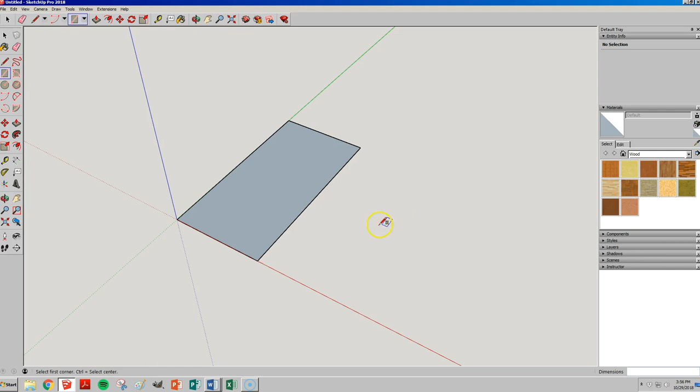By the way, in order to get this, instead of clicking on the rectangle tool, I just hit the letter R, and that gave me my rectangle tool. I'm pushing on the scroll wheel, and that's letting me orbit. Scrolling up, and that's zooming me in. That's probably about good for this drawing.

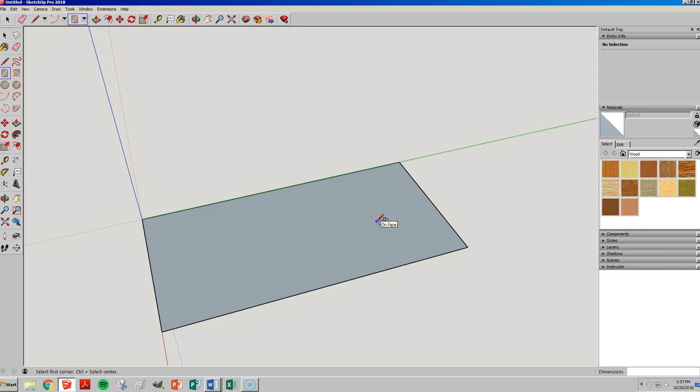Okay, next thing we want to do is push-pull that rectangle to give it the proper thickness, going 8 millimeters up. So we hit P for push-pull, and I'm going to drag it up just to start it. I've only clicked once, and now I'm going to type 8 and enter, and now I've got the beginning of my Lego block.

All right, one of the new things we are going to learn is how to divide lines rather than having to measure absolutely everything. So let's just start with this line. If I single left click that and then right click it, I get all the options, and we are now going to divide it. When I hit divide, I get all sorts of these little dots and things like that.

I can do that by dragging it - if you want to get it to the right thing, that's fine. But really, what I'm going to do, no matter where we drag it to, is override that by typing 4 and hitting enter. That line is now divided. I'm going to do the same down here: right click, divide, 4, and enter. And now you can see if I click on it, I've got individual line segments here. That'll be nice later on, as you'll see.

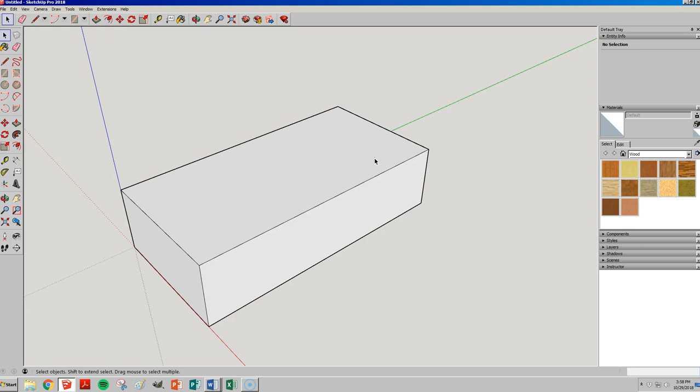I'm doing some math here, I got to count this out. 1, 2, 3, 4, 5. Okay, we're back at it here - I had to look up my measurement there.

We're going to divide this one by 8. Same thing: select with the left click, right click on it, now I hit divide. It's all changing all over the place. I'm going to override it by typing 8, enter. Same on the other side.

Divide, 8, enter. Okay, so now we're going to run some guidelines. Instead of going over to the tape measure tool, I can just hit T, and I get my guidelines set up. We'll start over here.

I guess I should talk more about that. If I click on a point to start my tape measure, it wants to go to an exact thing. I don't want to do that. Control Z is the same as going up to edit and hitting undo, so I just hit Control Z to undo that. I don't want to start from one line, I want to make sure it's on an edge, but just on any edge, so the thing will be red.

I'm dragging it in, and I'm getting this parallel line with the side I started from, and that's what I want. I don't want to go to a midpoint, I want to go until this one ends. Now I'm going to use where I divided my line at exactly 4 millimeters, and do that again to my next point, and to my last point.

Okay, now I have those in there. I'm going to do the same thing going the other way here.

To show you a new way to do that, I hit the space bar to get my select tool. I selected my first guideline, then my second guideline, and I want to make copies of those. I could go click on the move tool, but I could also just hit M. So now I have the move tool, and I'm going to make copies of just 2 lines so it goes a little bit faster.

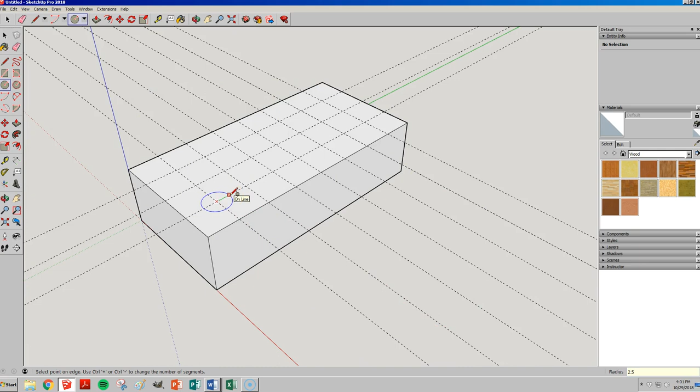Alright, so when this pops up, 'number of segments too large for the given angle and radius,' that means 48 was way too many for that small of a circle, because remember our Lego block is very, very small. So it kind of pre-shrunk it to a size that would work. We'll just continue doing that same thing here.

Another circle, and it automatically goes to 2.5, which is great. I could go ahead and keep drawing these.

But what I want to do for you guys is show you another way to make copies and speed the process up. So I hit the space bar to get my select tool, selected the first circle. Now I'm going to hold down shift so that little plus minus pops up, select the second circle, and now click M for move.

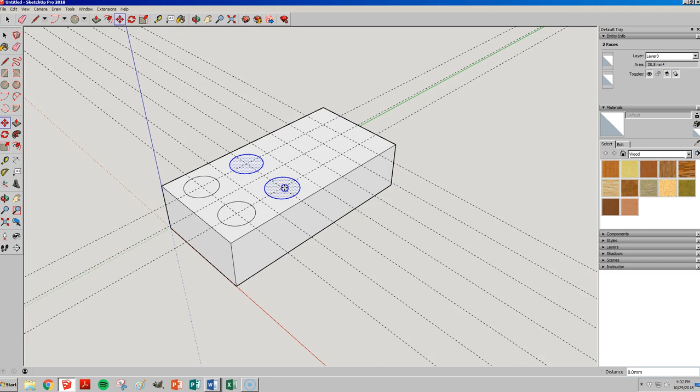Okay, now I've got these circles, and I want to hit control one time and the plus pops up again, so now I'm making copies. We don't want it right there, we want to kind of skip one. There we go, and I'm going to do it again, same process, again. And so now I hit my space bar to click off that. Now I have my circles that I need.

At this point, I do not need guidelines anymore, so I can go up here and delete all my guides.

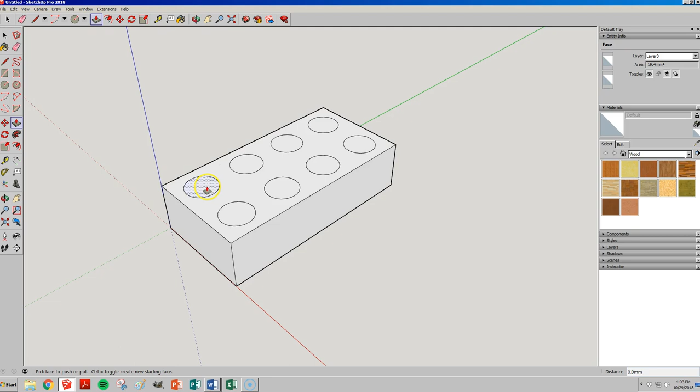The next thing we're going to be doing is push-pulling each one of these little circles 2 millimeters up. So I grab my push-pull tool, which was the P key, click on it, start dragging it up, then type in 2 and enter. Now I can either click it once and infer it by doing this, or I can just double click and it's going to repeat it.

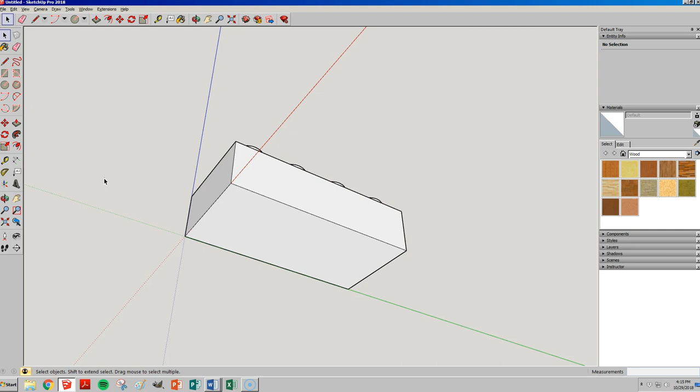What we want to do now is pan to the bottom. We are going to offset our bottom, so that's this tool over here. The shortcut to get to the offset tool is F. As long as my arrow is on the surface, it's going to work. By moving it around, it's letting me choose which edge I offset from. Right there it's on the left-hand side, then the front side, over on the right. Doesn't really matter for what this is doing, but you may need to offset to a particular thing someday, and then it becomes a little more important which edge you're going to.

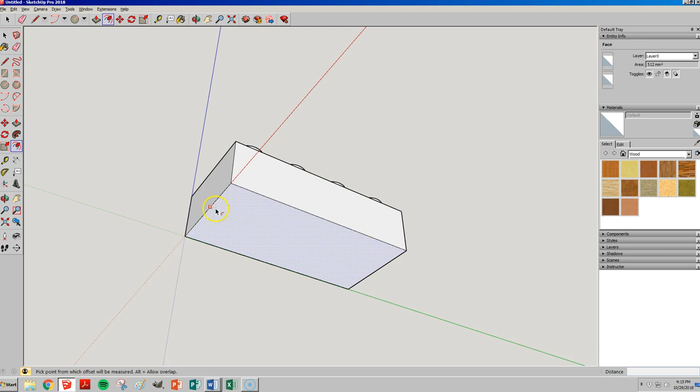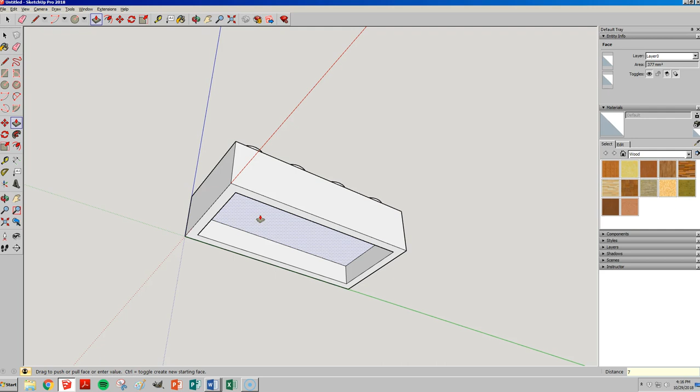But for me it doesn't matter, and for you, click any edge just on that bottom surface, click it once, and then we're going to move it in so it knows which way to go. Type 1.5, enter. Then I'm going to push-pull, so I hit the P key, moved it up, and we're going to go up. Let's make that 7 millimeters. So we're going to go up 7 millimeters, and there we are, we have a new surface.

At this point, orbit to the bottom, or you can go up to your camera and go to standard views and get a good view of the bottom there. Only thing for me is I'd like to get a little bit of a side view like this.

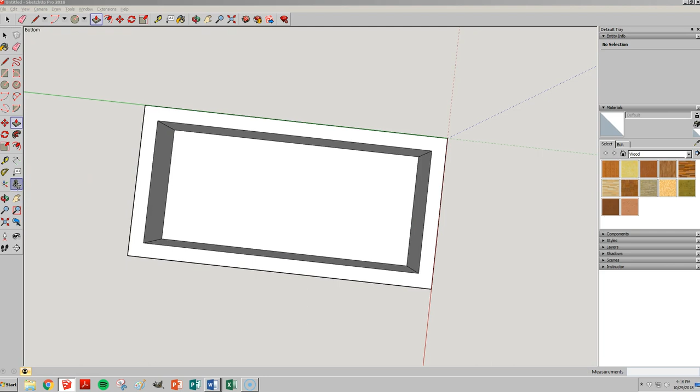Now we're going to create a watermark. How do we do that? We use this 3D text tool. Click that, and you're going to get a dialog box that will appear here. Mine's a little slow today, it's kind of lagging. Then this box pops up. This is what we want to mess with. When you first click it, this is highlighted. We want to change that. Type in your last name.

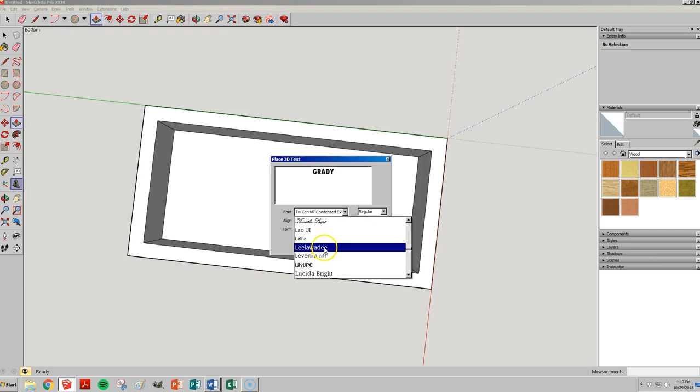You can go that, you can go all lowercase, doesn't matter. I'm going to go all uppercase. And then I can choose my font. Let's highlight it again. You can go to any font you want. Have fun with it, or if you don't care, you can just go with what's selected. Where's just an easy one here? I'm not too worried about it for mine, so I'm just going to pick a kind of a bigger, bold one. So I went with Impact there. Regular, we want that. Centered is totally up to you. If you want it to the left, right, doesn't matter. I'm going to stick with centered.

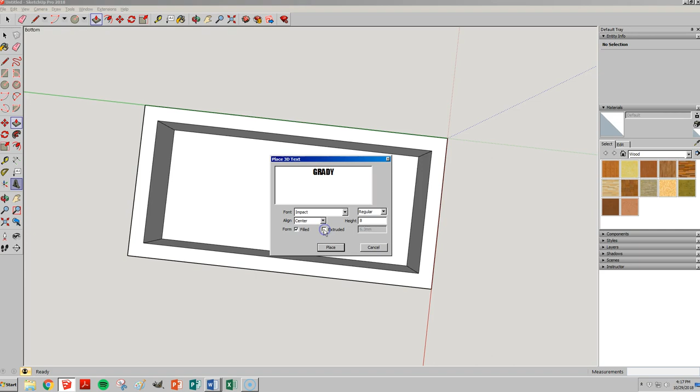Height is what's important. Yours may be a really large number. Remember on our Lego block, from here to here is only 16 millimeters, and from here to here is 32. So if this number is like 200, it's going to be way too big. So let's try 8 millimeters on that one. We do want it to be filled. If it were to be extruded, if this is checked, it's going to make that text a full three-dimensional thing. We don't want that for what we're doing, we want it just two-dimensional. So uncheck that, that makes this box that we can't write in it.

Then I'm going to hit place, and there's where I want it, on this surface. But mine is clearly not facing the right way. So once I click to place it on that surface, it takes me right to the move tool. I never had to click M or anything like that. And we want to spin that now, and by going on these little red crosses, we can do that.

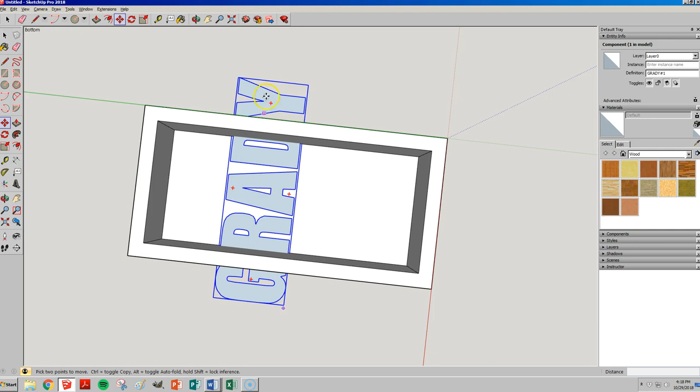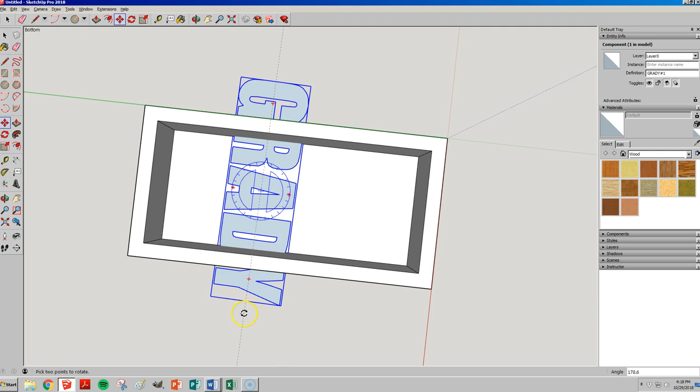So I'm going to grab it there and spin it. You can see over here we have our angle that we're going to spin it. So if I want it this way, -90. If I want it like this, I'd probably go... we don't want anything close, you know, 179, that's close, but we don't want that, we want it exact. This way would be 90. So I want it like this, so I'm going to go with -90. Even though I'm close right there, I'm going to override it by typing in the keys. -90, enter. Now I'm going to move it so that it's in the middle.

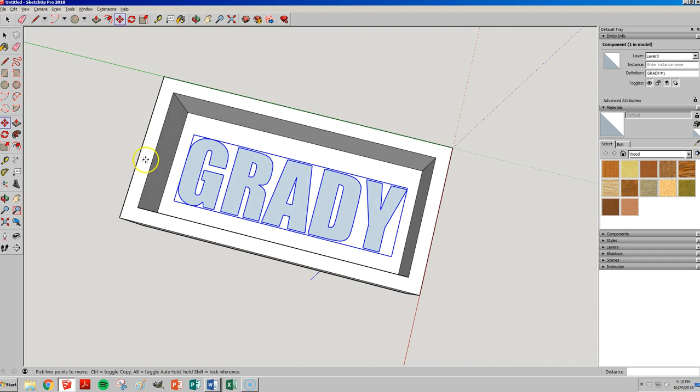So we got that set up now, that's where I want it. But what we got to do now is we're going to do some erasing. We've not done much of this in terms of very specific deleting. We're going to do that by going to the select tool or just pressing the space bar.

I want to get rid of this line, this line, pretty much all these ones that we made by push-pulling the surface. We're going to end up redrawing these again shortly. I don't want that, I clicked the surface there. But all of these lines here, I've got them all pre-selected, and now I'm going to delete those. You can see that now it kind of looks hollow.

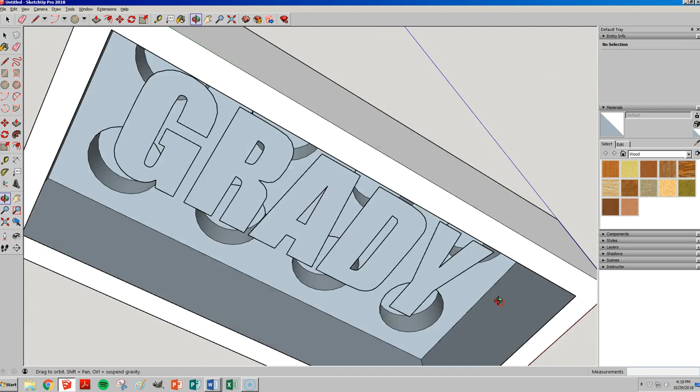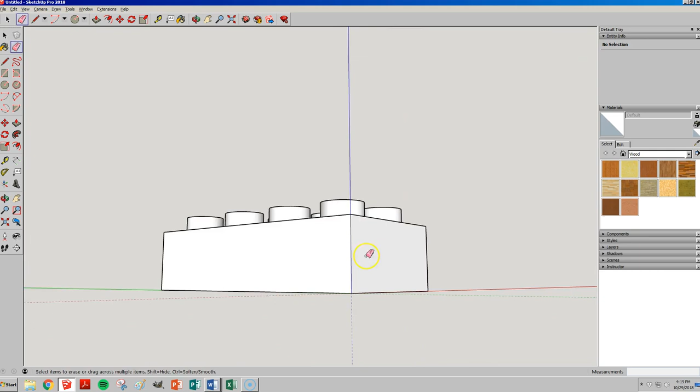That's what we're going for. We got a little bit more deleting to do, and now I'm going to do that in a different way. Instead of selecting them with my select tool, I'm going to press E, and that gives me the erase tool. I'm going to get rid of these lines, almost healing the bottom of our Lego block. Then we're going to go back to a normal view on top, and that name should kind of disappear.

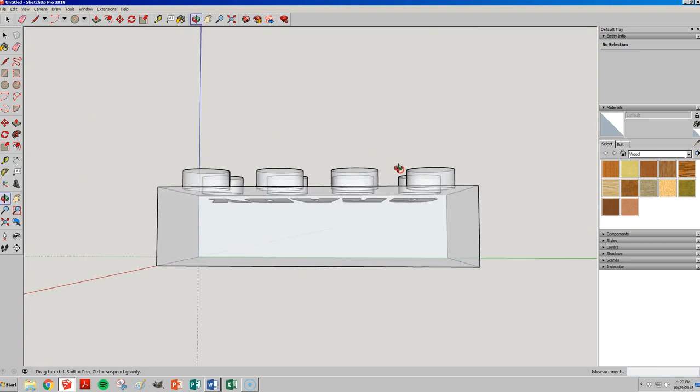So here's why it's a watermark - it's an invisible way to kind of make this your own. To check to see that it's there, I can go to View, down to Face Style, and I want to see X-ray. This is what I'll be doing when I check your work. It's actually floating 1 millimeter below the surface so you can't see it, but when I go to X-ray, I'll be able to see your name.

So we want to get rid of that X-ray style, so we'll go back, hit it again, uncheck it. Now we're good to go. Let's continue drawing the bottom of our rectangle. Our watermark is in place.

We need to make some more guidelines here. So this time I'm going to click on this one and divide it by 4 instead of 8. So I go to divide, click 4, enter. Divide, 4, enter. And I don't have to do the ends this time.

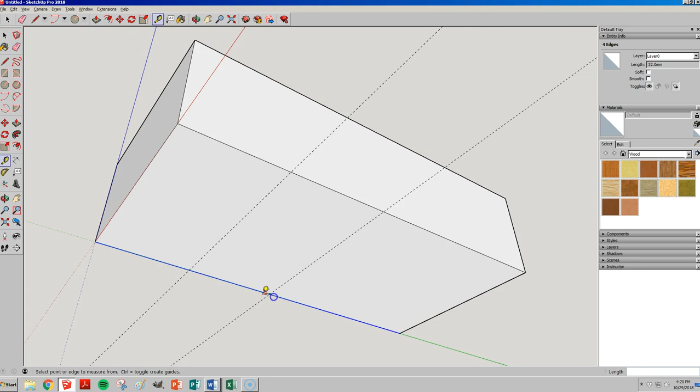Now I'm going to make some guidelines, so I click T, go down here, looking for the green dot to pop up. There it is - that tells me I'm at an endpoint. There's another one. And our final one is... I went too far, there it is, so we got that. We want to make one in the middle - click here, and I'm just going to go to the midpoint. So there we are, and we got our guidelines on the bottom.

We're going to be making some more circles and some more offsetting and things like that all along there. This is a little bit easier way to do it, I think. There's definitely other ways to do it that I think are a little bit harder, but this is what I find to be the easiest.

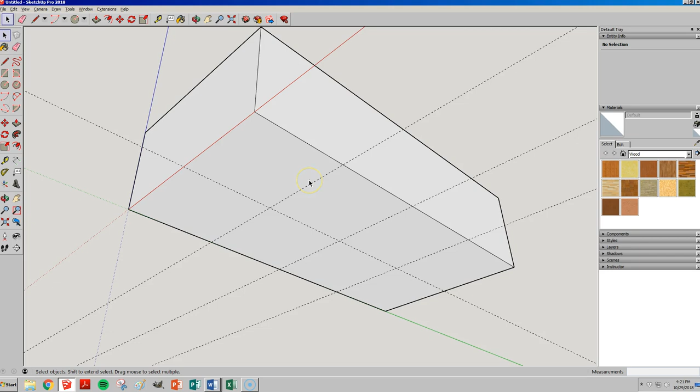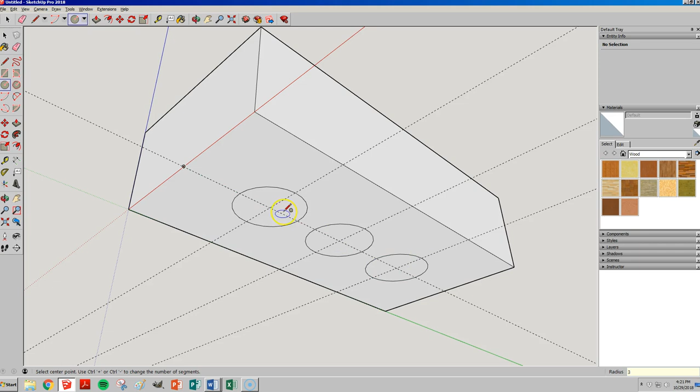So let's draw our circles first. Click on the C key or go over to your tools and choose the circle one. We now want these to be the same size as above for now, so we want a 6 millimeter circle, which means I have to type in the radius, which is 3. Got that one. 3 again, and 3 one final time. Now we need a kind of second circle on the inside of these.

So we go back to our center line, and instead of going all the way out there, we want to be a little bit short, and we're going to go 2.5 for our radius. So that's going to give us an inner circle with a diameter of 5. So there's that. 2.5, enter. 2.5, enter. So we've kind of got our circles drawn now.

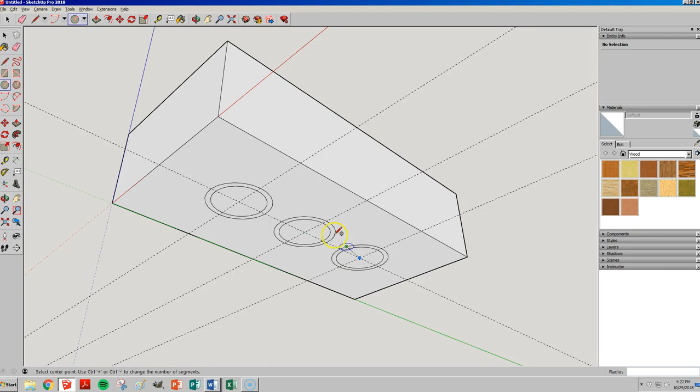Now we need to redo our offset that we kind of erased, but we're not going to pull it as deep as we did before. So again, to offset, click F. Doesn't matter which side, and I want to do 1.5 again. And hit enter - now this is the surface that we're going to be push-pulling away.

So click P. Oops, I've already got this outside rim selected, and so it's kind of predetermining that that's the one I have to push-pull. I don't want that. So I simply go back to Select Tool by hitting the spacebar, click off my object, and now I'm going to push-pull again, and I get all my different surfaces to choose from.

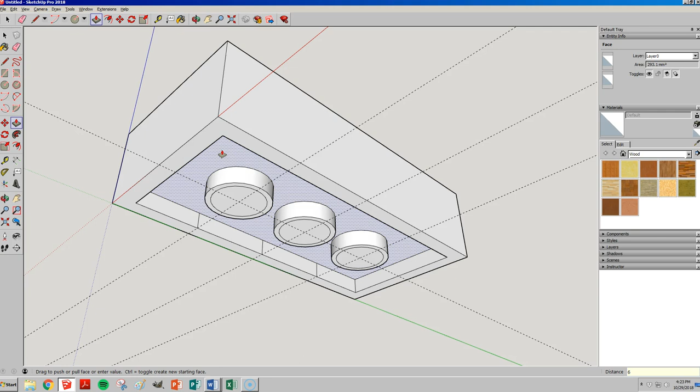Let's start with kind of the bigger inner part of our rectangle, and we want to go up 6 millimeters - push-pull that out of the way. I want the inner part of the circle to be the same, so I can click there and go over there to inference it, and you can see that went to the right thing. Or I can just double-click, and it goes to that same depth.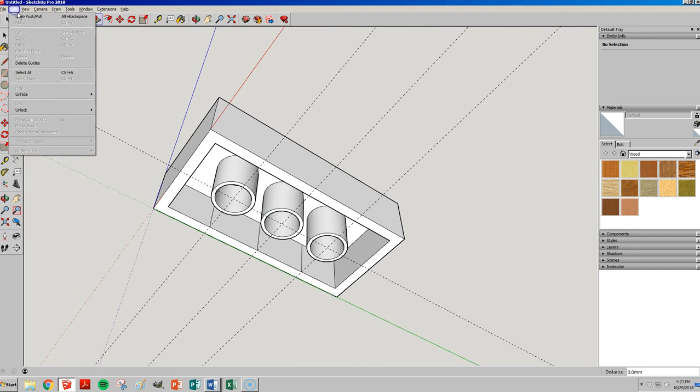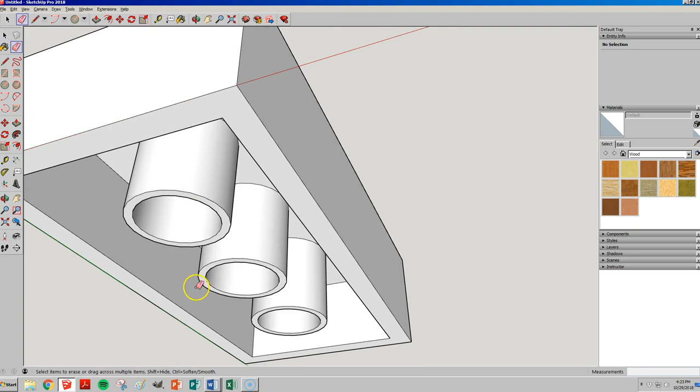And now we want to get rid of our guidelines again, so I go in and delete guides. It's up to you - these marks here, these lines you see right there, those are kind of left over from dividing this line. If you don't like them, I don't really like the look of them, so I'm just going to click on the erase tool and get rid of them. That's going to heal those surfaces, and I'm going to go over here and do the same exact thing. Now I have my Lego block that is completely finished.

So, it's up to you guys, but growing up where I grew up, we always had different colors. So why don't you go ahead and have some fun with the paint bucket.

I hit B for paint bucket. Whoops. So B gives me the paint bucket. I want to be in colors, so I went over there instead of in bricks and everything. I'm going to go to colors named, and that will bring up my colors there.

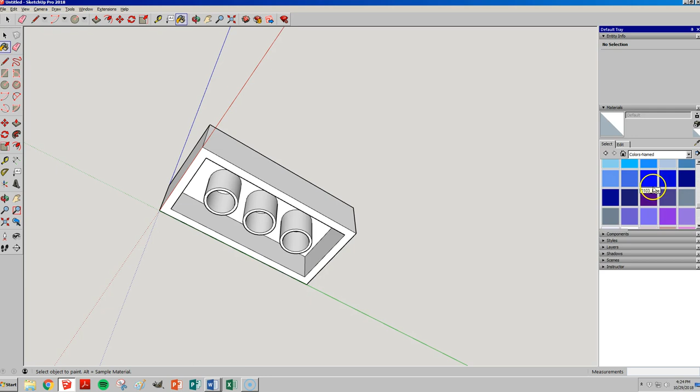And we're almost done with this block here. I'm just kind of waiting on my computer to catch up with me. I don't remember off the top of my head what the 2x4 block was. I'm going to make mine a nice blue. So there's blue, and I'm going to have to go around and paint each surface.

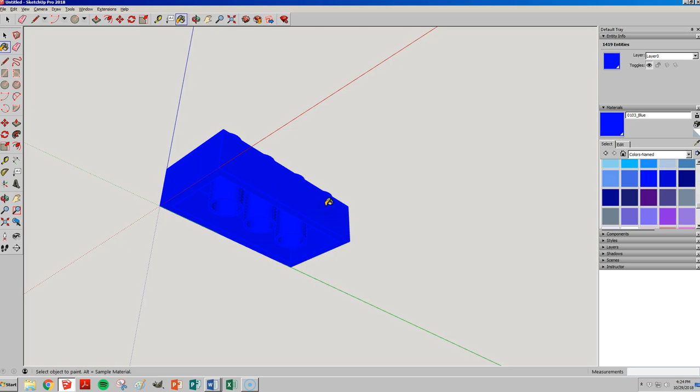That's one way to do it, by selecting those, but if I undo those, and I go back to my select tool, which is the arrow, and I triple click the whole thing, now I get my paint bucket tool and select blue, and I can just click one thing and it makes everything blue. So that's a little bit easier than having to go in and select each and every single surface to paint that. A little bit faster way.

So the last thing we want to do is put a little bit of a name signature on the top. And we're going to use our 3D tool again. So let's get ourselves a good top view. I'm going to zoom in.

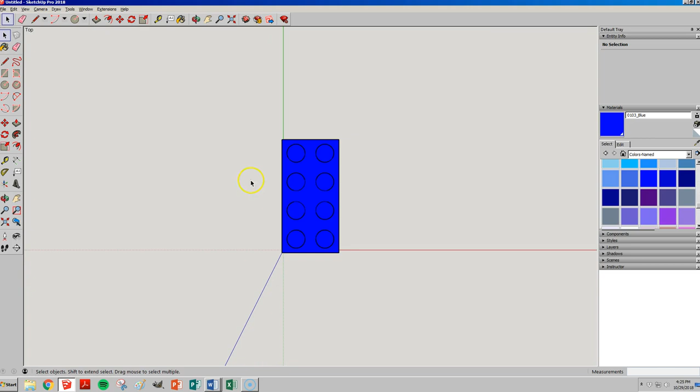Okay. Oh, and so that's by pushing on the scroll wheel, it lets me orbit. And if I just hit the shift key while I'm doing this, it changes into kind of moving the screen with my orbiting thing. And so that's a nice way to do that, is just hit that shift key and move it how you want it. Alright, so 3D text.

We're going to place this again, and this time we're going to do a couple of different things. We're going to do 2 separate placements. So we're going to type Lego, all caps, and let's get a kind of a more normal font, if you will. So I'm going to go all the way up to the A's, and I'm just going to select Arial Black, so it's a little bit bolder version.

We're going to want this very small. I don't even know. Let's see. Let's try 1 and see if that's the right size. This time I do want it extruded, and let's just start with 0.5. We're going to see how this looks. We might come back in and change this. But for now we're going to do 1 millimeter high, and we're going to extrude it 0.5 millimeters.

That doesn't look too bad. That might be extruded a little too much. So let's try it again. So I'm going to Control Z, that undoes that, and we're going to place more 3D text here.

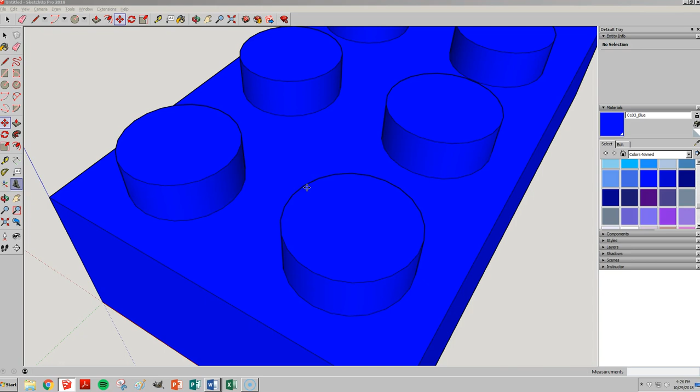Wait for my window to pop up. Here we go. All caps, Lego. And I felt like this was just too much. So let's actually go 0.1. There we go. And you can see that now it actually has a dimension to it. And that's what extruding means, is putting that on there.

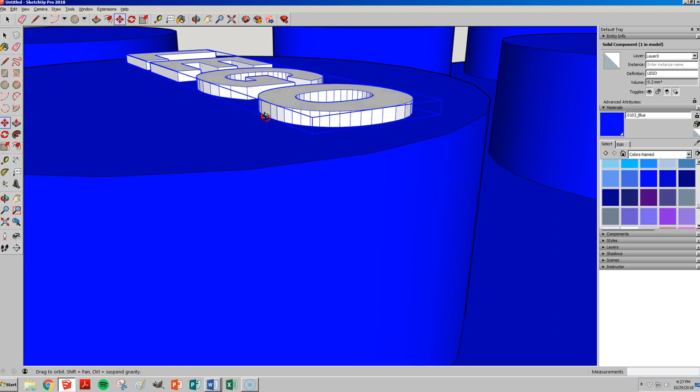We want to do our best to get that as centered as much as possible. When we move it, we can just kind of select it. Still, we're on our move tool. And that looks pretty good to me as far as centered left to right goes.

And then we are going to add our last name under it. So we go add another 3D text spot. So I'll wait for my window again. We're going to do our last name again, and I'm making mine a little different. I kind of would like maybe like a handwriting font. So let's go down here and find something. If you're fine with it being the same text, that's totally fine.

We're going to make it smaller. Well, let's do it this way. So I'll place it at this size, and then we're going to learn a new tool. This tool over here is called the scale tool. You can go over here and click on this, or I can just hit the S key, and our options pop up again here in order to change things.

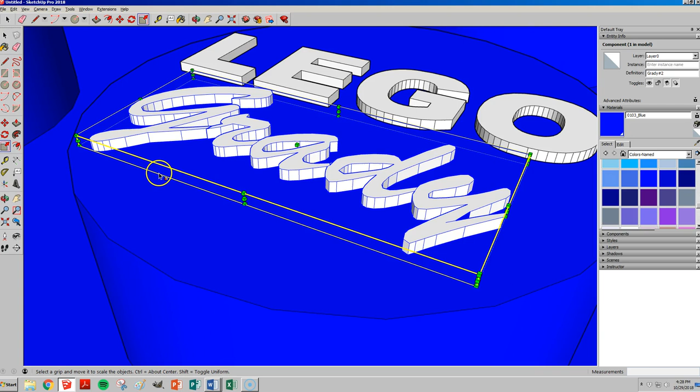Changing the size of this all depends on where I click. If you click right in the middle, it just shrinks it all together. If I click up here, it's going to make it thinner also while I'm shrinking the size. All sorts of control, but I don't really want to do all that yet. I just want to kind of change the left to right and the top to bottom. So I'm going to grab this top over here, and I'm shrinking it, and that's probably pretty good.

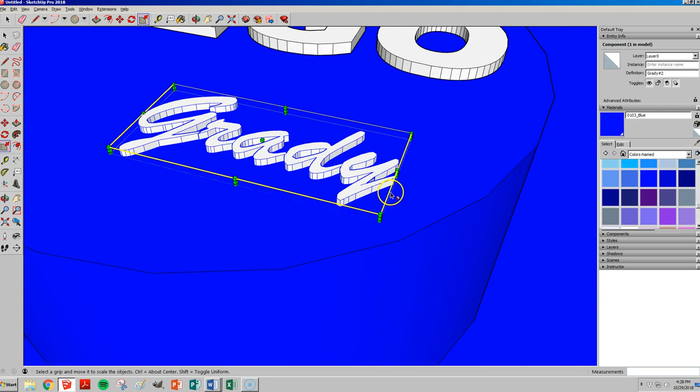A little too tall for me. So now I can go over here, and I can just kind of bring it down if I want. The other way to do that, of course, would be to open that up and push-pull it and things like that. We don't need to do all that.

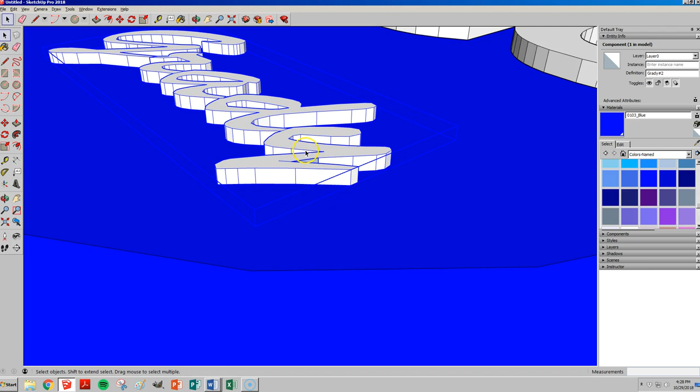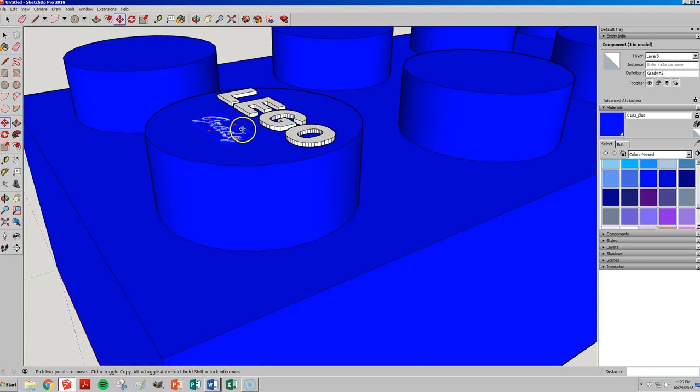So what I'm going to do is simply go to my scale tool. I can grab it right in the center even. That gives me some really good control. Make it even smaller. So now we've got our name there. I'm going to hit the M for the move tool. And now, maybe I made that a little too small, but that's fine. You get the idea.

Okay, so we want to put this on all these though, right? So with that select tool, the arrow tool, I select that one. I'm going to hold shift so that I can also select your last name. And now they're kind of grouped together. And let's make a move now.

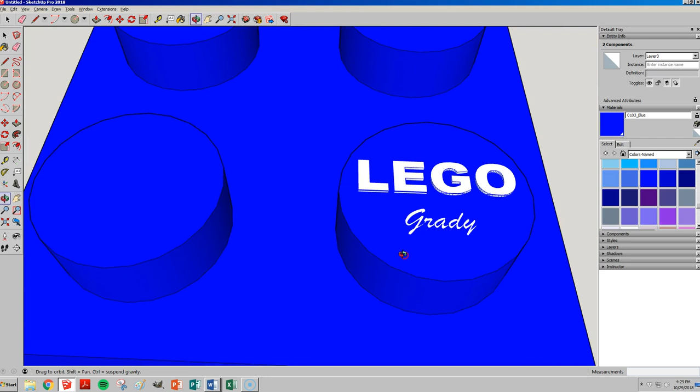And this is where I think it's kind of nice to do this, to leave this. I'm actually going to reference the edge so that it's exactly the same. So to move it, I'm going to go down here to where that end point was when we divided our line. So now I'm going to be really accurate with my move. And I'm just moving it.

I don't want to do that. I want to make a copy, so I can hit the control key on the keyboard at any time. And I want to go right to this end point. And now I've made copies.

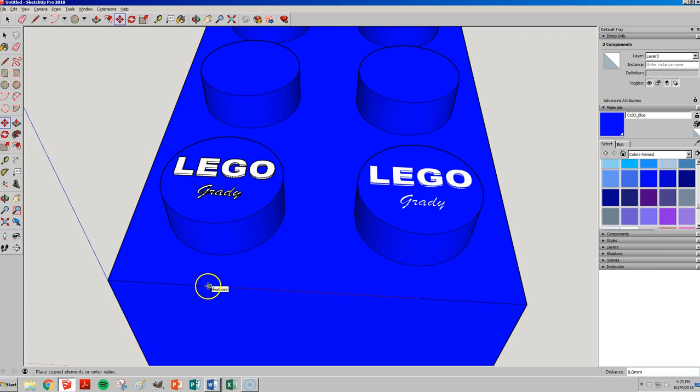So let's go back to select, which is the space bar. Select this and this, and now I have all of those selected. Hit M, we're going to make some more copies. So I hit M, tap the control key. Got all those. I'm going to tap the space bar to get my select tool. I'm going to get all these again. Now I've got all 4 selected.

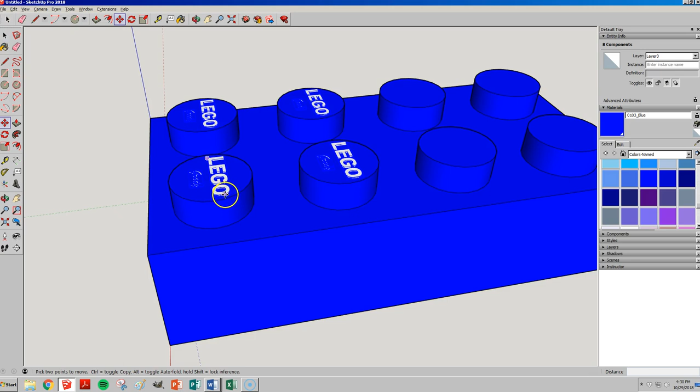Go back to M, tap the control key to make copies instead of... that's not far enough. I want to go one more endpoint to endpoint. And now I know they're all the exact same, locked in.

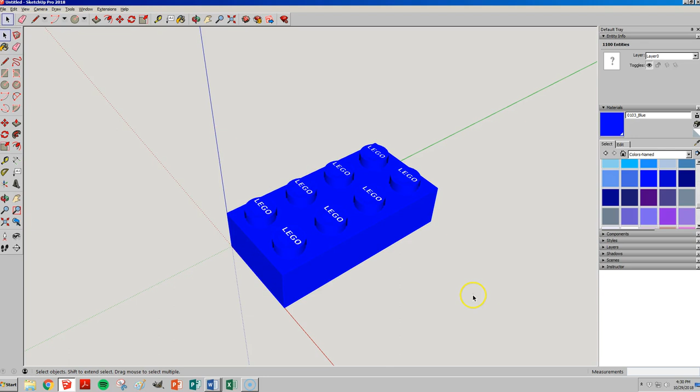And I want to make sure everything gets painted blue, so I selected everything by dragging a window. Okay, and then my paint bucket tool is already on blue. There we go. Select tool, click off of it. And really your Lego block is now complete.

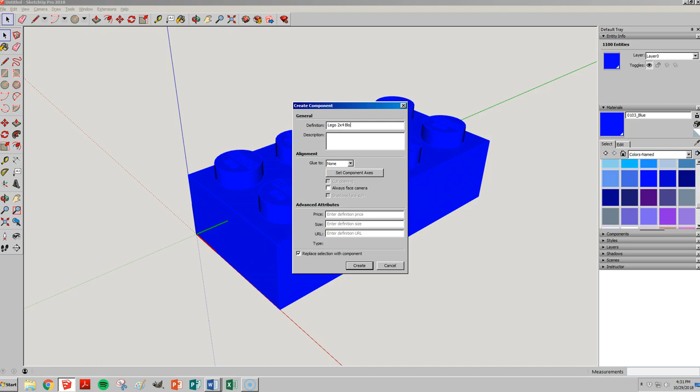Let's go ahead and get in this habit too. Select everything, and let's make it a component. Lego 2x4 block. And then we will hit create, and now it's all locked together.

So if you want to see your watermark and things like that, we can go up here to View, and we go to Face Style, X-ray, and now you can see the watermark is underneath. I can see all the way through everything. And your Lego block is now complete.

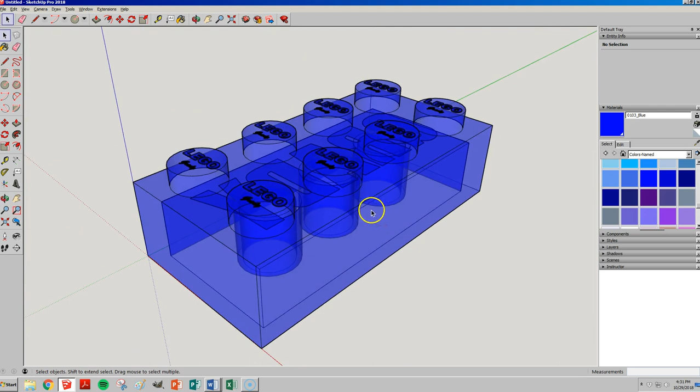The last thing that I want to remind you to do: let's go to File, and we're going to hit Save As, and you're going to name your file. So, Lego 2x4 dash, and then type your name in there, and wherever you want to save it. If you want to save it on your desktop, whatever you want to do, just hit save, and you are now finished with your Lego 2x4 block.

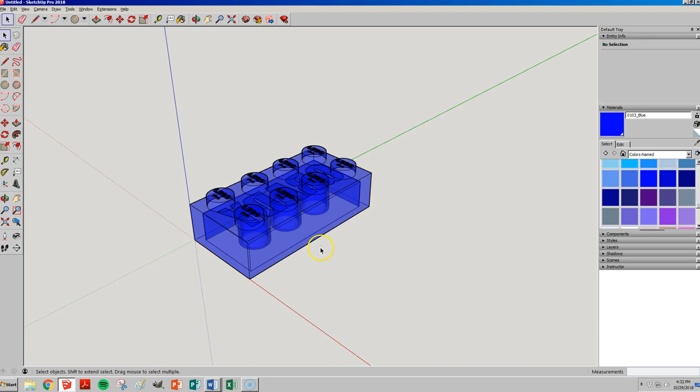Kind of forgot about this—we also need to draw a 1x1 block. I would recommend drawing those separately, so we're going to kind of piggyback off this drawing, and we're going to actually open up a completely separate one and do it a little bit differently.

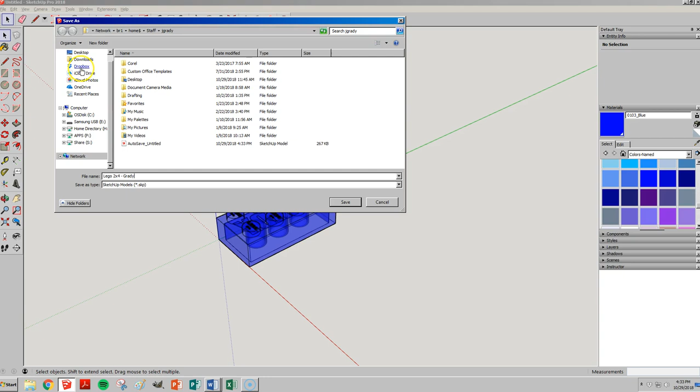So hopefully you've already done File, Save As, and save this however you want. Lego 2x4 dash Grady. Where do I want to put mine? We'll just put it here. In mine, this is a different folder I use that I can kind of work with at home. So we'll put it in Dropbox over there. All right, that's saved. Okay, Control New.

I've got a completely new screen. It's untitled because it's a new thing, and I now have two kind of SketchUp things going. So let's draw our 1x1. We're going to use almost the same process here, just some different measurements.

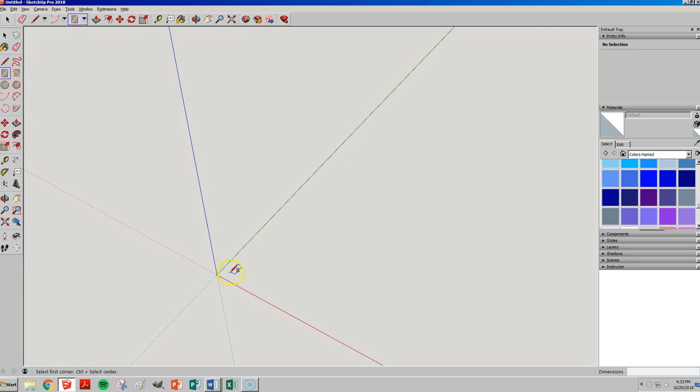Rectangle tool, which is R. We are going to go to an 8x8 square. So 8, 8, and it is very, very small, so we need to zoom in. There we go, a little bit better size now. And we're going to push-pull this thing 8 up as well, so it's 8x8x8.

We don't have to do the line dividing for this because really we only have to divide them in half, and our midpoints are there for us anyway. So I click T to get my guideline creator, tape measure tool. This is why we don't have to divide it. I can just go to the midpoint here, did that one, and now I want to go and do the other one. So now I've got my center line, and we got to place our circle.

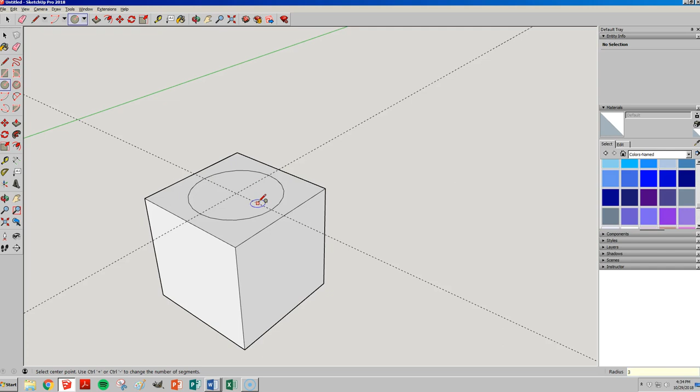So we hit the C, and remember, this was a 6 diameter, so it wants radius. I type 3, enter, and now we have this, and this is going to be 2 millimeters high. So I hit the P key to get my push-pull tool, and we're going to bring that up 2 millimeters, and that's all done.

We're going a lot faster here, so you might have to pause it. I can get rid of my guidelines, and I've got kind of the beginning of this. We're going to make the same thing, we're going to put watermarks in it. Everything's the same way. Let's start up here doing this.

So let's go back to our 3D text placement, and we'll do our Lego and our last name, and then we'll do our watermark later on. So it's already in the cursive. We'll remember that, we'll come back to it. Let's go back to Arial. A little too far there. Arial black, all caps.

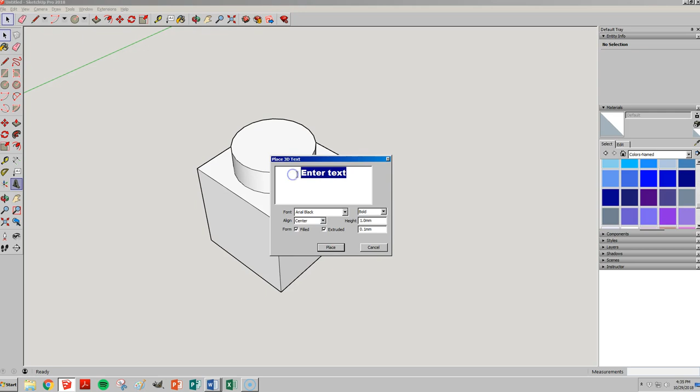I started typing before I had it all set up there. Arial black, now I go up here, select everything, Lego, all this is good. Place that, I'm going to kind of eyeball that, see how I do.

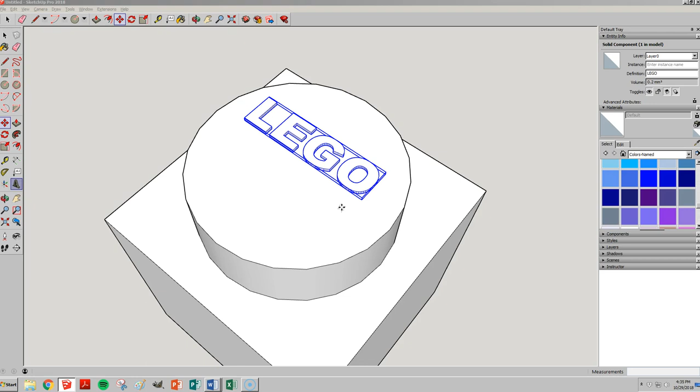Looks like I could do a little bit more there. That's pretty good, doesn't have to be absolutely perfect. Place another one, and here I'll put my last name under it, waiting for my dialog box. There we go.

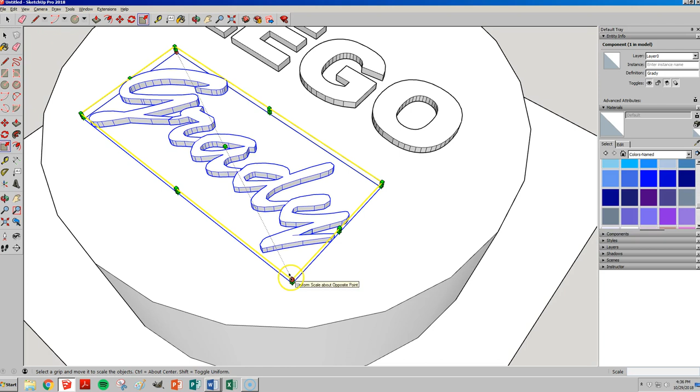I believe brush script was what we used last time, there it is. Place that. We needed to scale it, so I hit the S key. Thought I made it a little too small last time, so we'll leave it about like this, and we'll go a little bit, not quite as extruded. Go back to my move tool, so I click the M. We'll see how that looks. Pretty good, okay, so the top of it's done.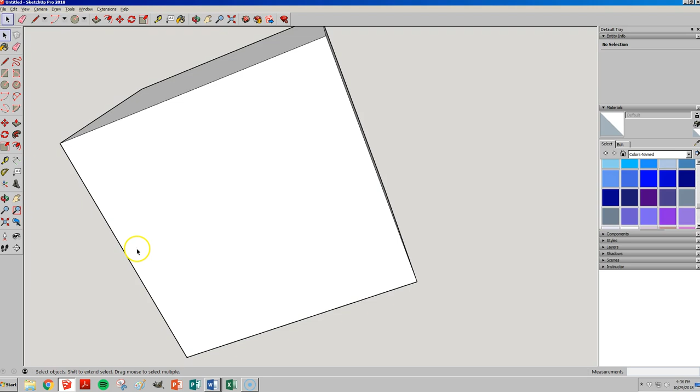Let's get our watermark ready to put on there. So F for offset, off to the side. F for offset, 1.5. We're going to push-pull the center here up 6, if you remember. That's where we want to place our watermark, so we go back here.

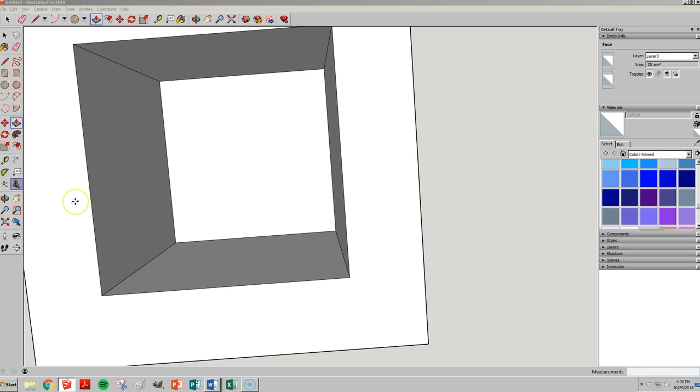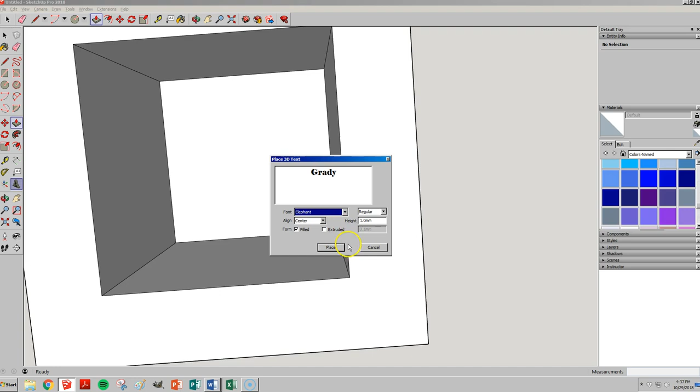Remember, on our watermark, we don't want it extruded, we don't want it 3 dimensions. As we type in our last name, you can pick any font you want for your watermark again, we don't want it extruded. I'm going to pick something a little bit of a thicker font there. No extrusions. Let's see what that looks like in there. Not bad, so now we want to start doing some deleting.

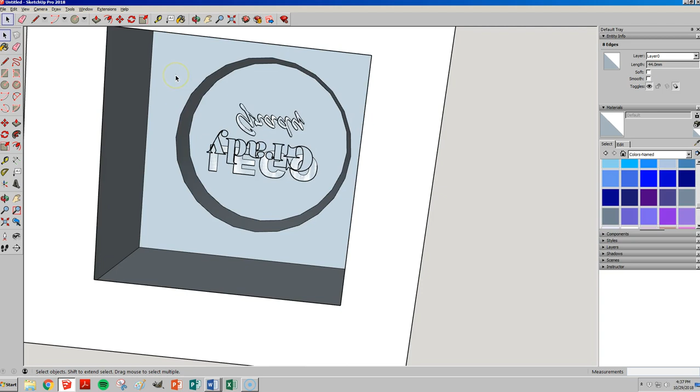Pick that, holding down the Shift key as I select these lines, still holding it down, getting all -- what are they, 1, 2, 3, 4, 5, 6, 7, and this would be 8. Delete those. Now we need to click E for erase and get rid of our lines up here.

And remember to double check that. We go up to View, Face Style, X-Ray, and she's just floating in there. That's what we want, okay.

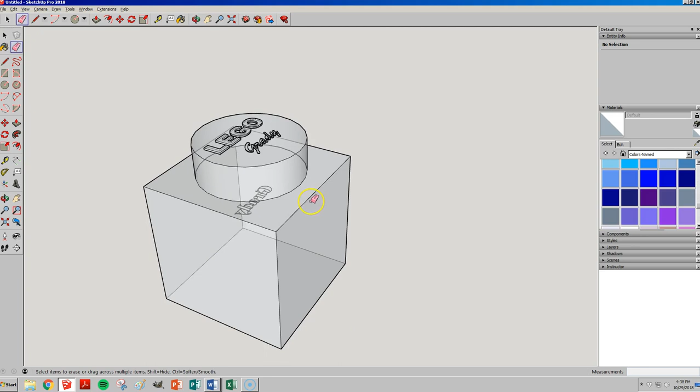All right, now we got to kind of redo this. I think I made a mistake there now that I'm looking at it, I don't think I push-pulled that enough. So let's see if we can move it while in X-ray mode. So I get move -- excuse me -- make sure I really carefully select that. I want to make sure it goes up.

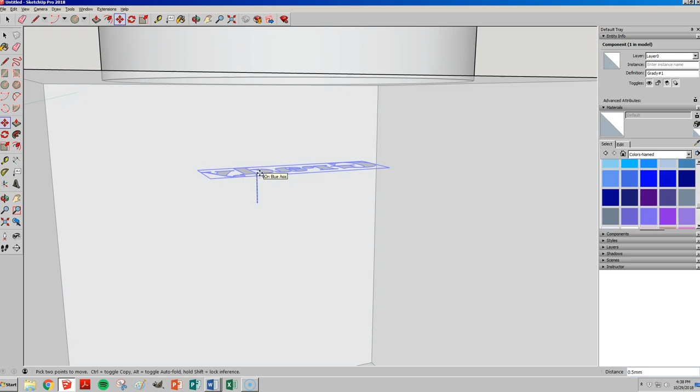So I'm going to click the up arrow, and see how that got kind of a thicker dotted blue line there? That means I'm locked into it moving up and down on the blue axis. So let's move it up 0.5 more millimeter and hit enter. So now I know it's going to be in the middle of that surface. Now I had it a little bit too low.

All right, let's get out of X-ray and let's fix our bottom. This bottom's a little bit easier to draw because we don't have the circles in it. So on the bottom we're going to hit offset, so I hit F, doesn't matter which side.

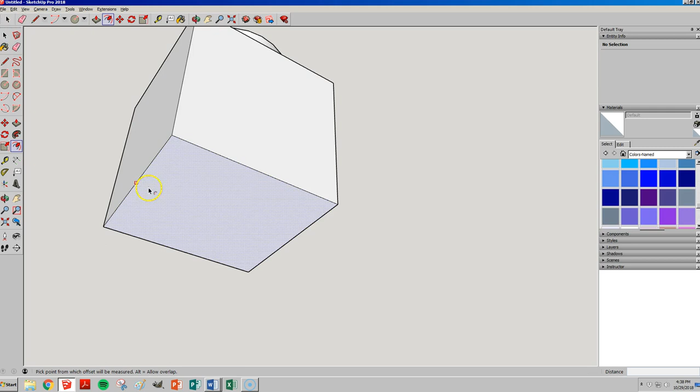1.5, okay. Now we're going to push-pull the interior surface. We want to move that up 6. And that is it for this one. We don't need a circle in this little 1x1 block.

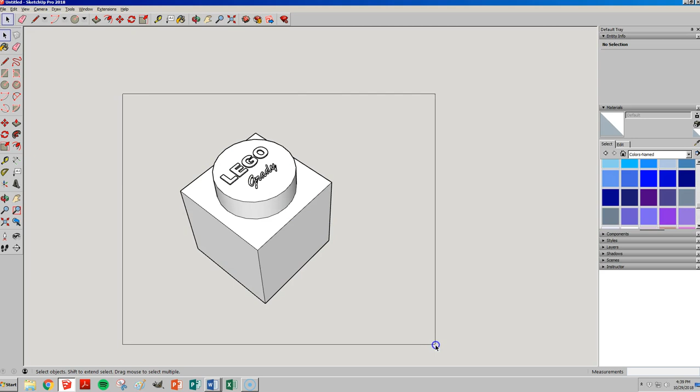So there's that. I'm going to hit my select tool, hit spacebar, and drag a window over it. I've got everything selected and I can paint it now.

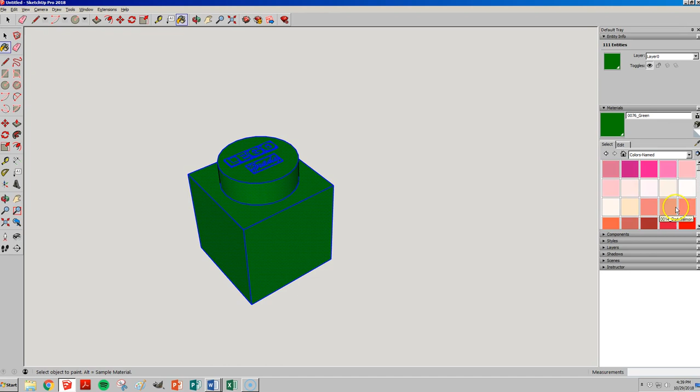I'm going to hit B for paint bucket, and I can pick a different color. I used blue already, so let's go with green on this one. I don't even know, were there green or yellow blocks? I know there were red. Let's do red instead. Keep going down. Where's my red at? There's red, let's do red instead.

Select so I can get back to my select tool. Right click, I'm going to make it a component. I don't remember how we titled the last one, but it's not too important—1x1 Lego block, as long as it's a component. Create. And there's our other component.

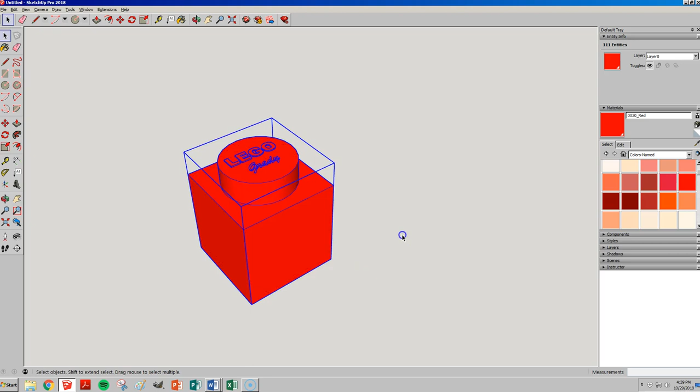We can check to make sure our watermark is still there by going into our face style again, X-ray. And there's everything that we need.

All right, so same thing: File, save as. I'm going to put mine in the same place I had my other ones. I can scroll down to look at what I called the other one—I did Lego block 2x4. So let's go Lego... no, block Lego 1x1 dash Grady. You'll do the same thing, Lego 1x1 with your last name on it.

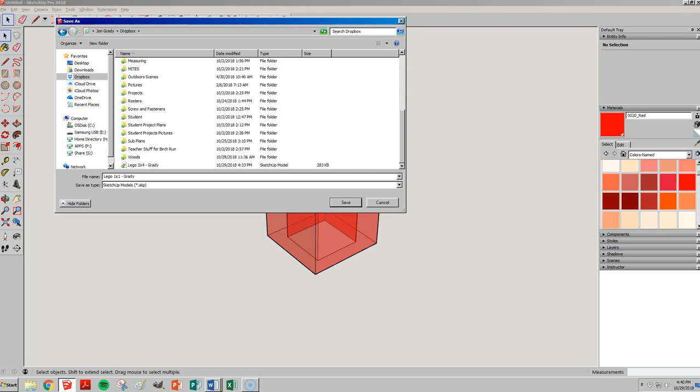All right, guess I kind of lied to you guys again—one more thing I thought I might as well show you. So now I've had you guys along with me, we've created 2 drawings here, got it saved. So I can go ahead and cross this out.

This is for my screencast, you don't need that. But let's open up now a Google Classroom assignment. What you would simply be doing is you'd go to Google Classroom. I'm going to have to open up a different class where I'm a student in it so that you guys can see what yours would look like from the student side. So I'm going to sign in just like you guys do all the time.

Sorry that my computer's going slow, I'm trying to make this last little part fast. Okay, type in your email address, your Birch Run Schools one. Type in your password, Google Classroom. So you would be going to whatever industrial design class you're in for this one, or if it's a different class, and opening up this assignment.

I'm going to go to one where I'm a student. This is one that I'm in with Mrs. Williams. Let's see, does she have an assignment on here? Nope, let's go back to a different one. All of us high school people are in here.

So here we have an assignment. This was a Power Standards thing that Mr. Berkmeyer assigned to all of us teachers. So I open it up, and here is... well, I guess it's not even letting me—where's it? There's got to be an assignment where I can attach something. That's a question, sorry about all this.